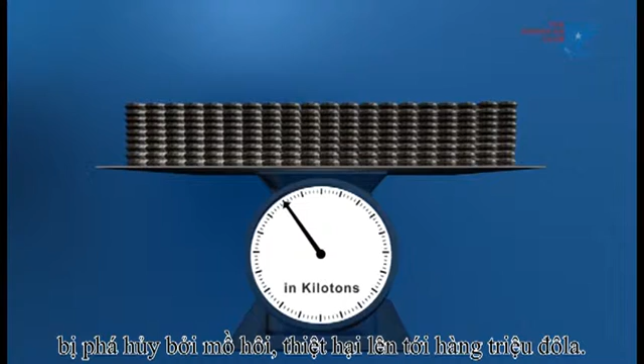Ship sweat, and cargo sweat. Every year, tens of thousands of tons of rice is damaged by sweat, amounting to millions of dollars in losses. That's more than enough rice to place one 100-kilo bag on every seat of a large stadium, or, more importantly, to feed thousands of families in a year.

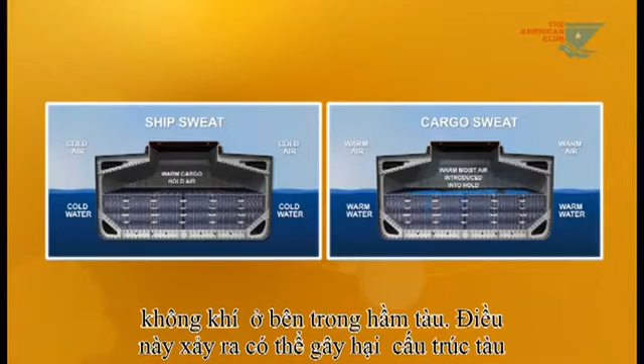Ship sweat and cargo sweat are the names given to two types of moisture damage to cargo. Sweat is the condensation of water vapor from the atmosphere within the ship's hold. This may occur either against the ship's structure or on the cargo.

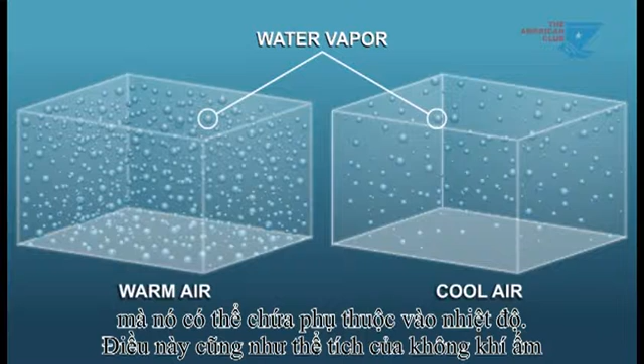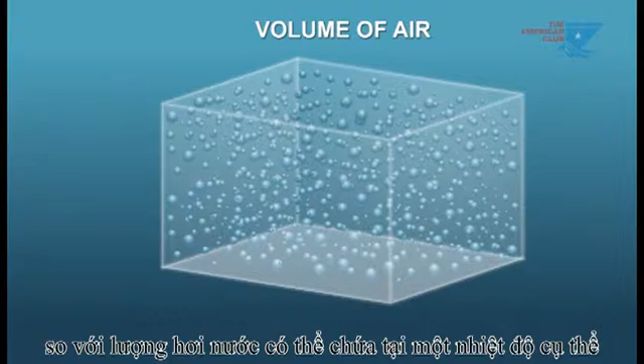All air contains water vapor, and the maximum capacity it can hold is dependent upon its temperature. The same volume of warm air can contain more water than cooler air. The actual amount of water vapor in the air compared to the amount it can contain at a particular temperature is called relative humidity.

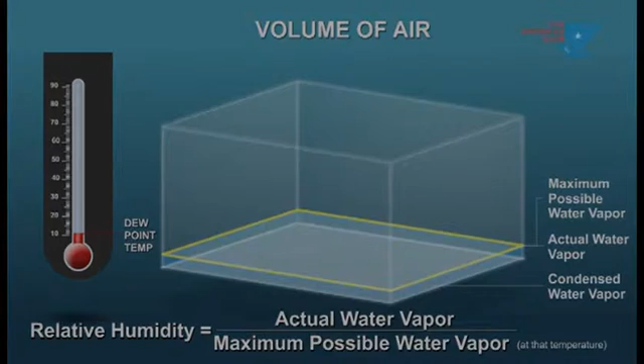Condensation occurs when air has a relative humidity of 100% or is saturated. The temperature at which saturation occurs is known as the dew point temperature. Thus, condensation will occur when warm, moist, but unsaturated air is cooled to its dew point.

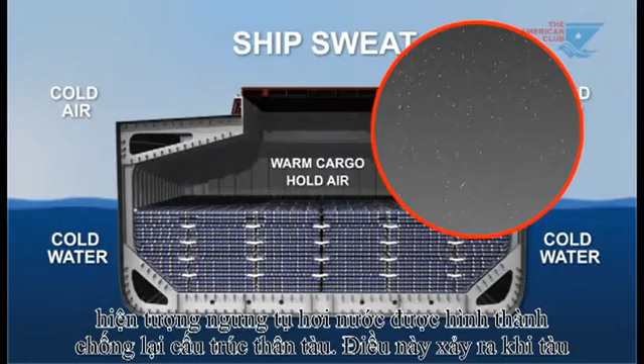Ship's sweat is condensation that formed against the ship's structure. This happens when a vessel loads in a port where the atmosphere is warm and moist and then sails into a cooler area. The ship's hull is cooled by the lower air and sea temperatures.

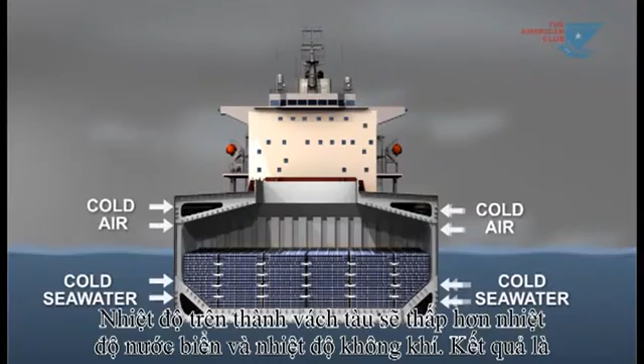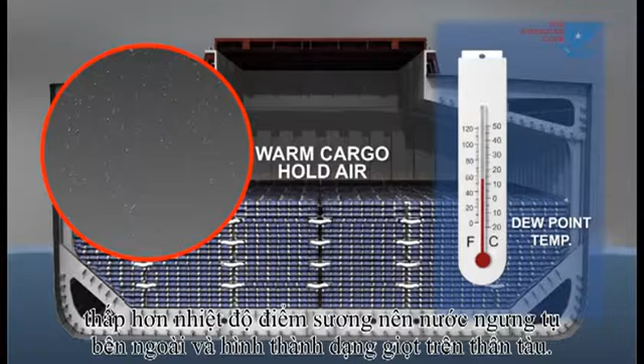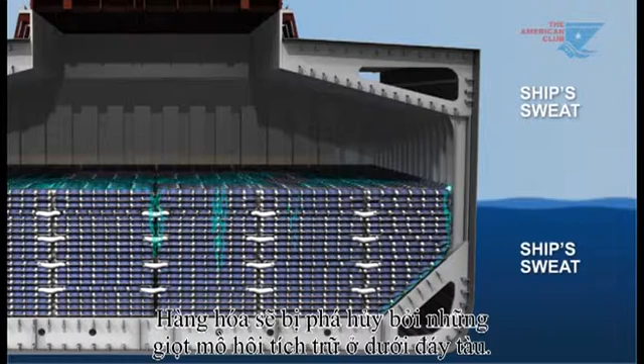As a result, the air inside the cargo hold, in contact with the ship's structure, is also cooled. When the air is cooled to its dew point, water condenses out and forms droplets on the ship's steelwork. The cargo is damaged when these droplets drip onto the cargo or accumulate at the bottom of the hold.

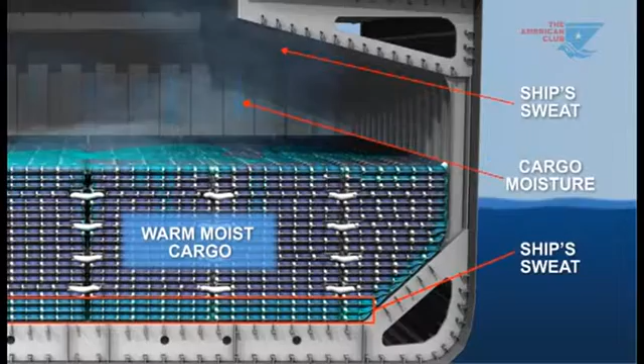Ship sweat may be aggravated when the cargo itself is also warm and moist. This moisture may be released into the air in the cargo hold and subsequently condense against cold steelwork. Unseasoned, green, or wet cargo dunnage may also worsen ship sweat by releasing its moisture content into the hold atmosphere. Cargo sweat is condensation that formed on the cargo.

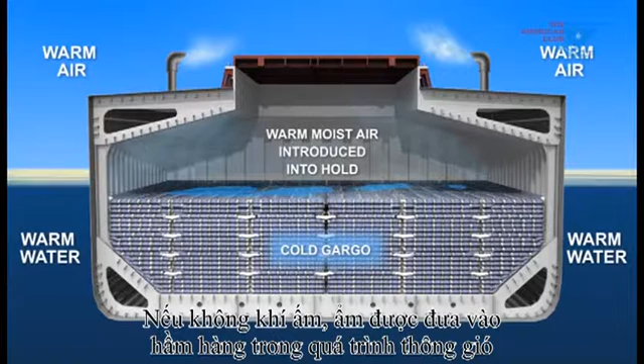This happens when a vessel loads in a port in cool conditions, then sails into a warmer area. If the warm, moist air is introduced into the cargo hold during ventilation, it will be cooled by the cold cargo. If it is cooled to its dew point, water will condense out and form droplets on the cargo surface.

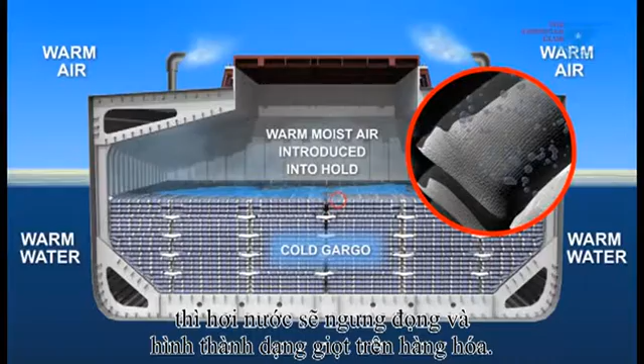Ship sweat accounts for the majority of claims occurring through inattention and failure to take precautions. Cargo sweat generally only occurs due to persistent, inappropriate ventilation. Both types of sweat are controlled by comparison of the dew point temperatures inside and outside the holds and appropriate ventilation.

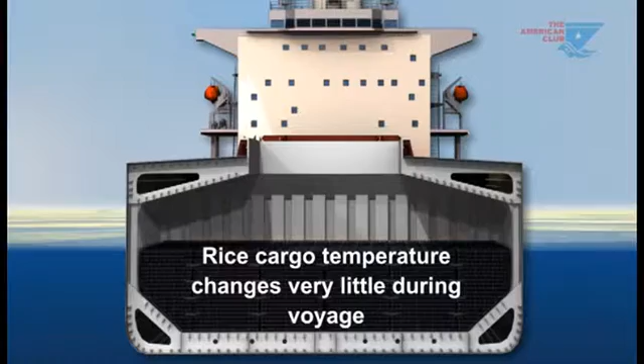A convenient rule to control ventilation relies upon the understanding that rice cargo temperature changes very little during voyage. The cargo temperature is taken during loading and compared once a watch with the outside air temperature. Ventilation is then controlled according to the 3-degree rule.

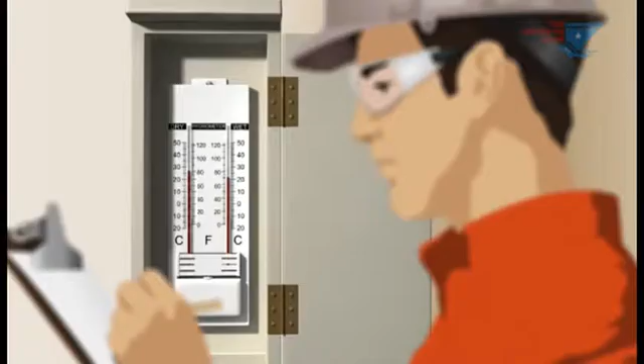The 3-degree Celsius rule states that the cargo should be ventilated if the external air temperature is more than 3 degrees Celsius lower than the air in the cargo hold.